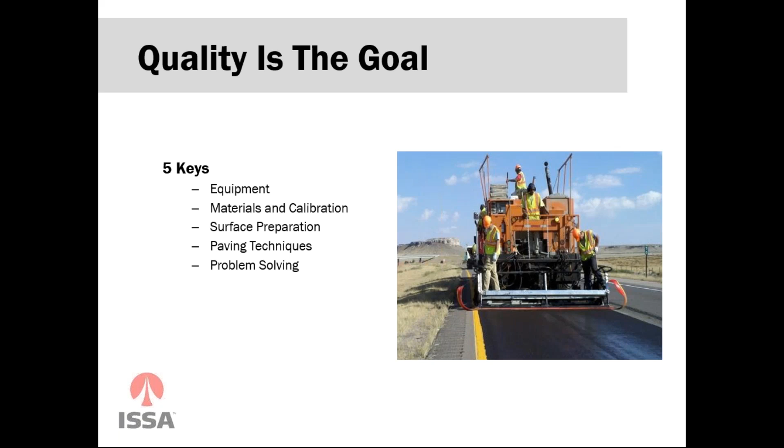There's 1,000 others, but for today, we're going to discuss these 5, being 1 is the equipment. We'll discuss equipment, different types of equipment, how those different types of equipment may work, what they may be able to do or not do to be successful for your project. We'll move on to materials and calibration and how important each one of those processes is in this procedure. Lots of materials go into this application. You can have the best materials, you can have the best everything, but if your calibrations are not done or not correct, then none of that's going to matter in the end. We'll talk about some surface preparations and things you can do beforehand to make that job successful, and if they're not done, what it can lead to. Different ways of paving and different applications that can be used to make the job successful, and then again, the problems that we see in most micro jobs and what we can do to fix them.

So in saying that, we'll jump into the equipment and start from there. So what is a slurry paver? A slurry paver is a lot of things all mixed up into one box. If you've been in hot mix, you know that there's a lot of different applications and different equipment and needs that you need to be successful and to process that job and to produce that job for the agency or the owner to be successful.

So we got a dump truck here bringing rock to or from a job site. You got your hot mix plant where all of the materials needed for that job are brought to one central location and put in and come out at the end for your 9.5, 12.5, your HMAs that are needed for the job. It's just kind of out of order, but there's your roller at the end, making that road nice and smooth, getting that bonus, that ride bonus at the end of the job.

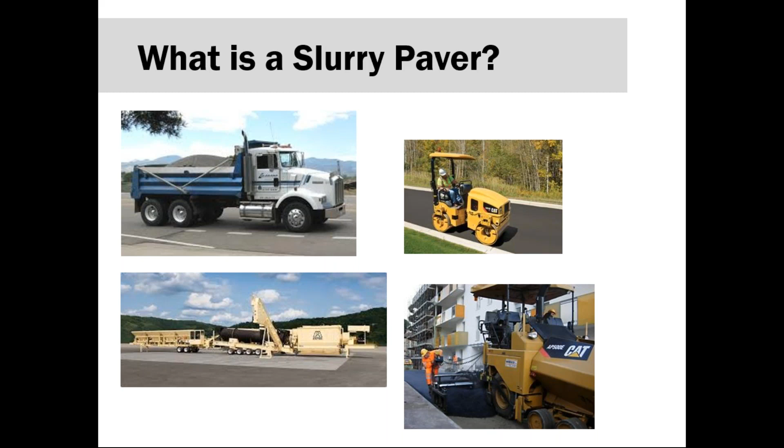And obviously your paving equipment that's on the road laying down that mat. So when you take all four of these things from a hot mix application, when you're talking about slurry equipment, what you have is an all-in-one package.

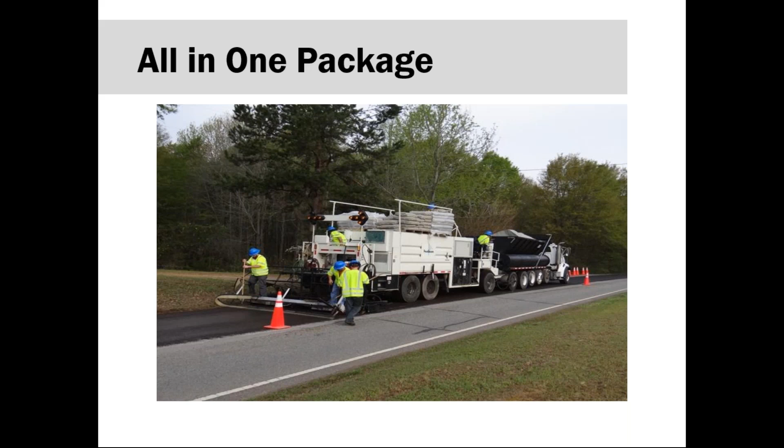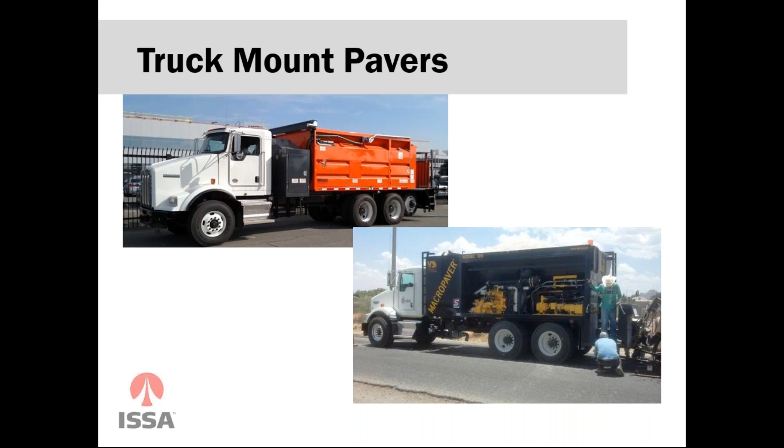It's the same as the continuous paver that I showed you earlier, in the sense that all the material is located here. There's tanks. You'll see the tanks on the front for your water and emulsion, your rock, everything coming out in the back in a finished product.

So there are advantages and disadvantages to both types of these applications. Being a truck mounted paver, your advantages are your flexibility. You're able to move around, as you can see, on your own wheels. You're not needing any help getting from job to job. You got smaller crews in the sense that you've got a driver and the same people working each truck on the back of the job. You've got a smaller crew.

You're able to get to the job easier because you simply have to drive the truck. And then the maneuverability - there's an asterisk here on maneuverability, just because depending on axles and depending on weights, that can be an advantage or disadvantage, because of bridge laws and things in each state that may cause challenges as you're moving from job to job.

So when you're talking about truck mounted pavers, some of the disadvantages are the fact that every time that truck goes empty, you have a transverse joint at about every 1,500 feet or so, depending on what your pounds per square yard are. You have heavy axle loading, as mentioned earlier, that may affect maneuverability. And then this equipment is somewhat expensive, considering the fact that it's going to spend three-quarters of its life driving to and from the stockpile, because once it goes empty, it needs to return to the stockpile.

It has to return and reload. When you're talking about truck mounted pavers as well, your operator does not control the speed - the driver of the truck is controlling the speed. So there's a communication requirement needed between those two guys to make sure that we're laying an efficient mat on the back of the vehicle.

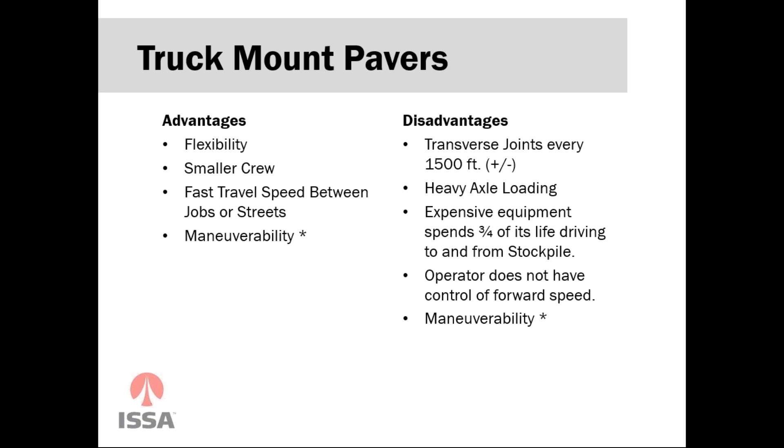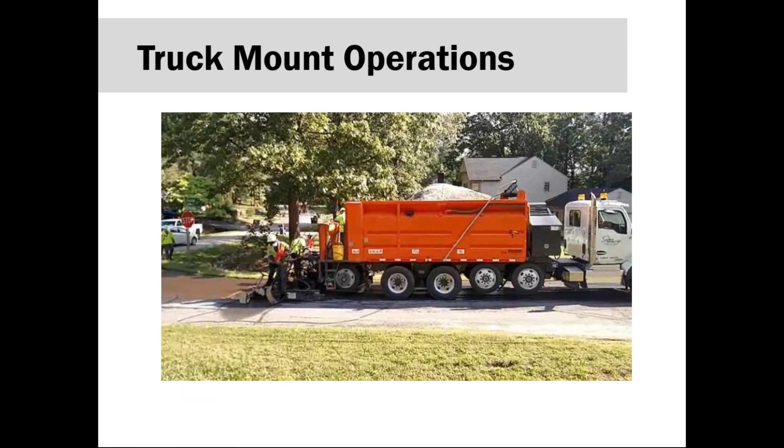So as you can see here, this is a truck mounted operation, just to give you guys an idea what that looks like for you non-contractors on the call today. You'll see the material disappearing from the hopper. Your emulsion and water tanks are obviously on the side there, and material coming back to place a nice mat, 8 to 12 feet wide, in the back of the vehicle.

So the other side of the operation, if your job or position is not requiring a truck mount, is the continuous paver. And this is what a continuous train, as we would refer to it, looks like. You've got your continuous paver, you've got your support units up front, bringing material to and from the stockpiles to the equipment. And as you can see, the guys on the back of the equipment, they are ready to lay the mat down.

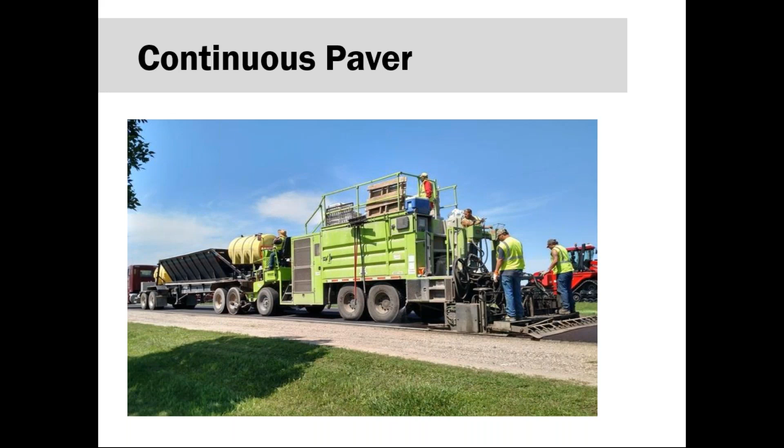Looks very similar, but just to give you an idea what that train looks like going down the road. You'll see the guy walking up and down the stairs there.

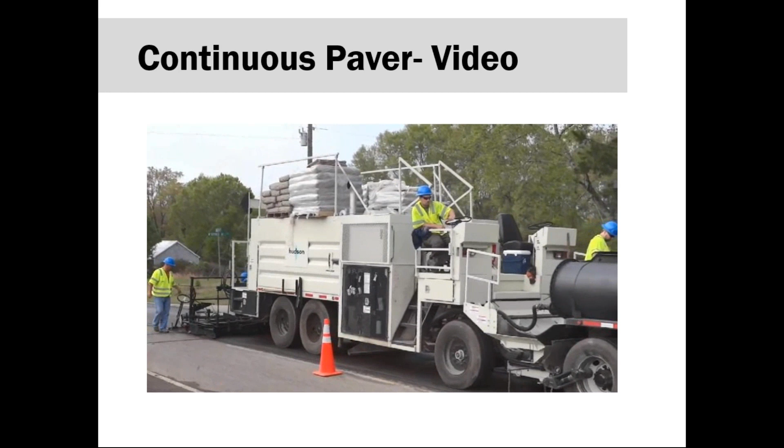His job is multiple, in the sense that he's required to hook that truck up, and he's required to unhook that truck when things go empty. He's also watching the hopper and the cement hoppers to make sure they're adequate in materials as they continue to move down the road, hopefully with no equipment failure or material issues.

So they can continue down the road at infinite lengths with no joints. That's one of the advantages on the continuous paver. So fewer transverse joints when you're talking about continuous. Your operator on the back of the machine is controlling your speed, which is different.

You have the guy on the front who is steering, but he is simply doing just that. He is maintaining that joint line to try to keep things straight and in line as they move down the project.

For the most part, in a continuous job, you're going to be able to do more miles per day. Your driver can move to either side of that truck to be able to get the best visibility and the best options to maintain those lines and joints.

When you talk about support trucks, they're inexpensive in the sense that they're only going to the jobs, to the stockpiles and back. And with the continuous paver versus a truck paver, you're only having to calibrate once. With a mounted paver on a truck, you're having to calibrate each machine, versus a continuous where you're only doing that one time. The disadvantages obviously are if that paver goes down, then you're down.

You need additional crew members to perform these options because you need more truck drivers, longer lengths of road that you're probably going to do inside your closures. So more safety and regulating with road closures. And then you have one paver per job.

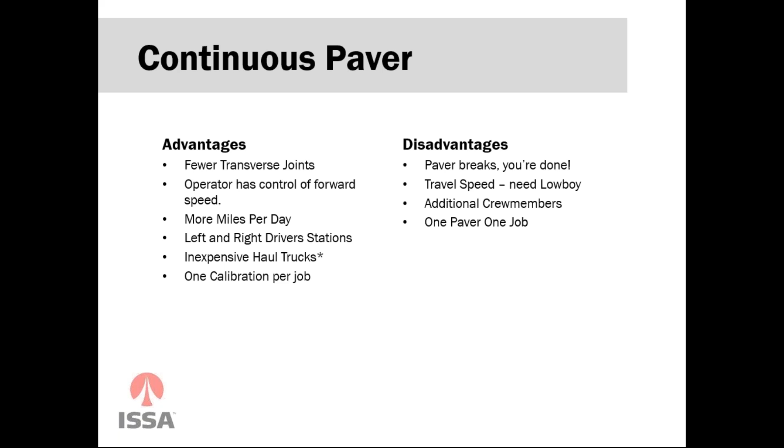So both pieces of equipment are applicable in any circumstance. One's not necessarily better than the other. They just may be better in that situation than the other, given the circumstances.

So talking about either one of those pieces of equipment, you have two different types: mechanical and electronic. For the most part, mechanical units are being phased out in the sense that most everything in the market today is moving to the electronic side, but they're still out there. So from an educational standpoint, we'll discuss both for these purposes.

In a mechanical or air-over-hydraulic system, you've got a jack shaft that is powering the emulsion pump and the aggregate belt, keeping those things in the same ratio. Those hydraulic systems are operated by basically poofs of air, and each poof of air is like a counter. It's keeping that jack shaft, your emulsion and aggregate in sync, because all of your mix designs are based around your aggregate for the most part. So everything needs to be in relation to that.

The different ways of counting your aggregate can be by gates, or by the speed of conveyors, but there are different options as to how you do things, and that's what we're discussing here with the mechanical and electronic options.

So when you look at electronic pieces of equipment, that piece is using computer-controlled hydraulic motors, separately powering the aggregate belt and the emulsion pump. What that basically means is when you're talking electronic, you're talking speed of the aggregate versus amount of aggregate that you're basing things off of. So there are always adjustments going on, and that computer is maintaining the ratio between your aggregate and emulsion in your mix design.

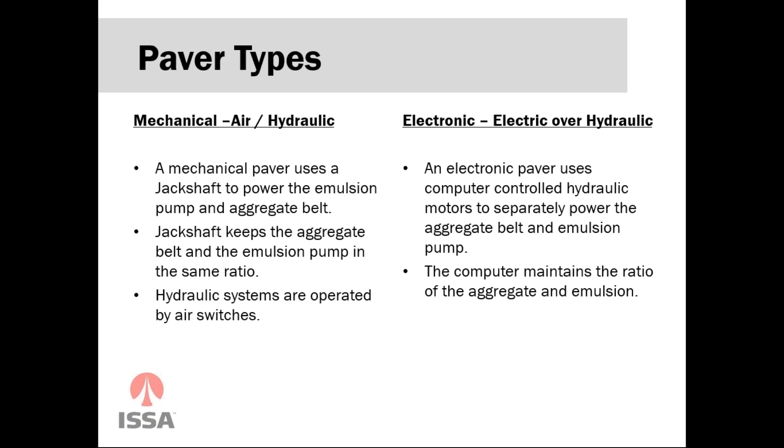Your mechanical paver, like I said earlier, the aggregate is going to be based off how much aggregate you're allowing out of the back of the hopper. That gate is going to move from 2 to 3 to 4 inches, and that's going to control how much aggregate you're having.

Your emulsions and all those things are going to remain consistent, and you're going to control that system by how much aggregate you're pushing out the back of the gate. So you're using electronic counters, counting revolutions of that belt and that emulsion pump to maintain that ratio between the two.

When you go to electronic pavers, it's a fixed aggregate gate. The same amount of rock is coming out depending on the speed of the belt, but the hole on the back of the gate is never changing. The emulsion content is controlled by that computer controller.

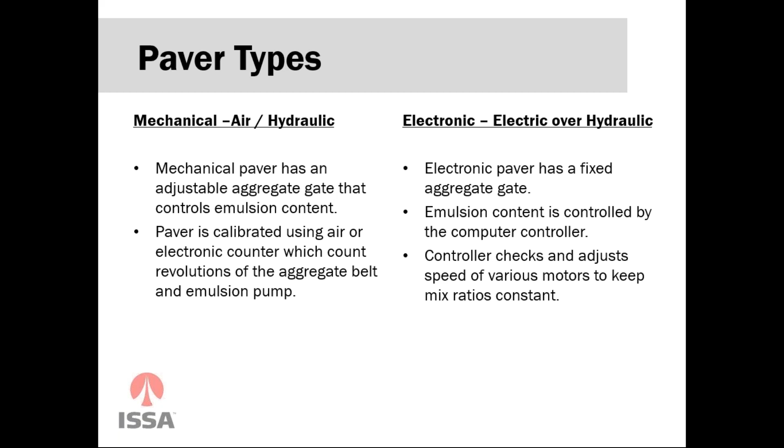If you speed up, it's giving you more emulsion to maintain that mix design. If you slow down, it's giving you less emulsion for that mix design. And then it continues to check and adjust the speed of various motors to make sure that we're maintaining the mix ratios consistent with the job mix formula.

This is just a quick picture here of the two different setups. On the left is the mechanical jack shaft. You'll see the cranks and the chains and sprockets as you would imagine with a mechanical setup. And then to the right, I don't want to say neater, but more as you would imagine with an electronic system, as things evolve, where you've got your checks and balances, your emulsion pumps, everything in a nice neat box there and being pushed by the hydraulic units.

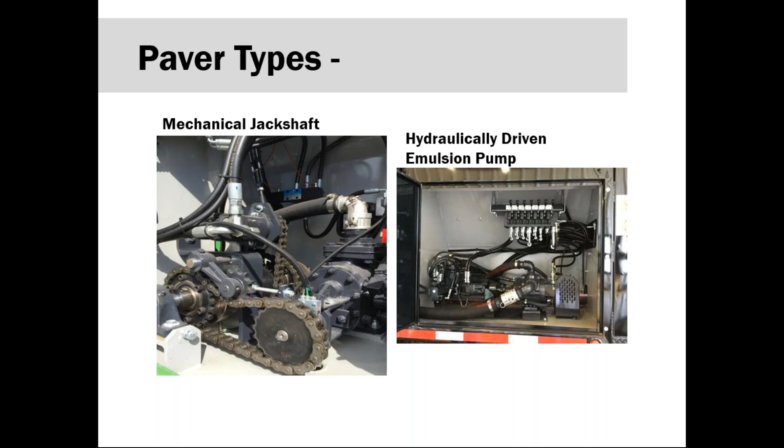So as we have truck mounts and continuous pavers, we also have different computer systems to help us through the process and make sure that we're doing these quality projects in any particular circumstance. So you have a monitoring system on the left, which is basically capturing the information with those counters that we discussed earlier.

It's capturing that information, but whatever information you're putting in, it's capturing, whether it's good, bad, or indifferent, that's the information that it's catching. At the end of the day, it's going to give you a visual and printed report. It's going to be able to show you the quantities that you used, all the percentages, and the square yards applied. In the same sense, whether those numbers are right or wrong, that's what it's going to give you.

When you start discussing computer mix control, what that's doing is you input your mix design, the parameters which you're trying to do the product, and it is not going to allow you to be outside of those parameters. So there's where the control comes in. You still have control of your mat, you still have some options with how your mat's going down and what you're trying to accomplish, but it's going to make sure you maintain the ratios of emulsion or water or additives, whatever it may be, that you're complying with what the owner of the project has requested and been approved for that project.

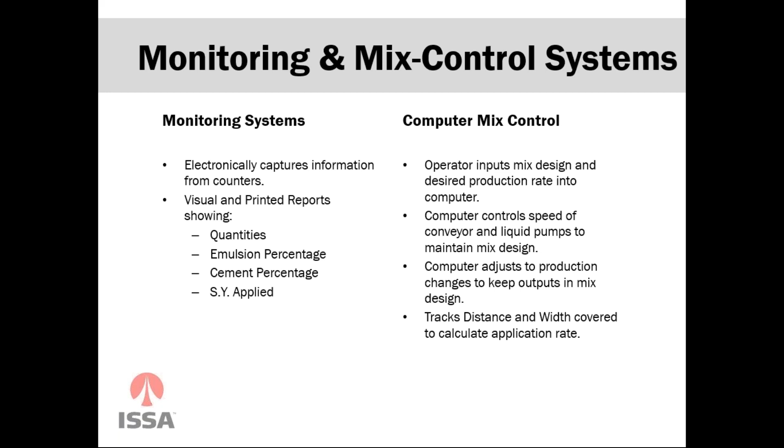So that computer controls the speed of the conveyor and the pumps to maintain that design. It's adjusting to the changes, and it's always making those changes to make sure that we're retaining that information that we gave it earlier to stay in that mix design. And it's also tracking your distance and your width, which allows us to put down that total square yards or those pounds per square yard that we need at the end of the day, which most owners are looking for.

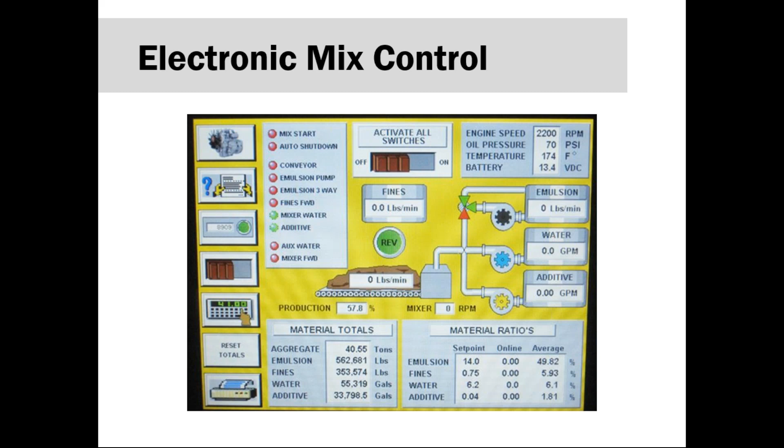So besides the machine, the second part of the equipment standpoint is the box on the back of the machine, which I pointed out earlier. There are different options depending on what you're trying to do.

One would be your Slurry Box, which is a lighter box, expandable to different lengths. You can do it with no augers, or with front or dual augers, but with a Slurry Box, because of its weight, it is slurry only.

Versus you have your hydraulic spreader boxes, which are all dual augers. They can perform with slurry or micro. To expand or decrease the widths with those boxes, you must stop and take certain kits out to bring those joints down to the width you're trying to perform.

And then you have your variable width spreader boxes, which are also dual auger and can do slurry or micro, and they're adjustable on the go, which I'll show you pictures of later on how that's performed.

And then of course your Rut Box, which is specific to job descriptions or needs depending on the situation of the road you're trying to perform on, and we'll show you the parameters of jobs that sometimes require those Rut Boxes to be needed.

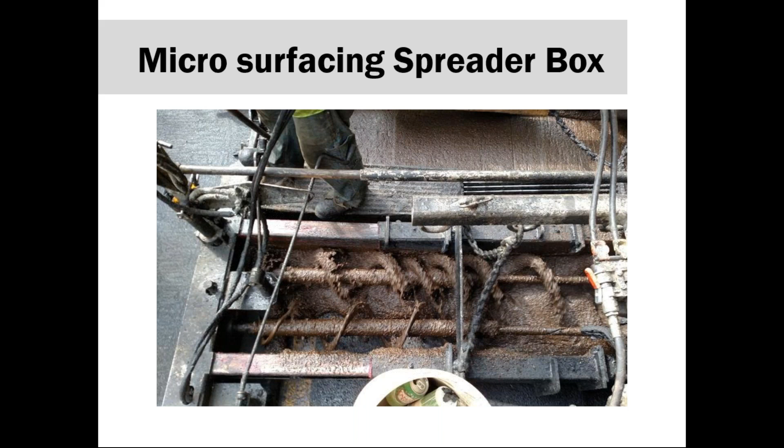So here's a different type of micro spreader box. You'll see it's a little beefier. The back of the job is obviously at the top of the screen there with the mat going down, dual augers. I'll show you a video here in just a second. Augers are always trying to move material to the back of the box to keep it from building up in the front, as you can see in the photo here.

And here's a video of the spreader box operation. Two things to show you: one, the augers are moving, as I spoke of earlier, moving the material to the back of the box, which is on the top of the screen. Second, the material shown in this video is actually a little to the wet side of what we would prefer. You can see material coming out the front of the box in the beginning as they try to thicken things up, but it's a perfect level in the sense that material is right to the shaft of the box and things proceed as you would expect as they move forward.

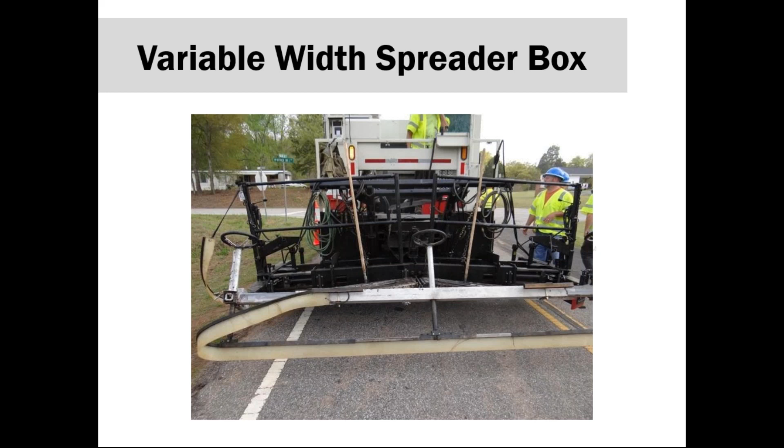If you look up to the left and right around the gentleman's head in blue versus the street sign on the left, you'll see some toggle switches there. What that's allowing us to do is move that equipment and that box by hydraulics, to be able to expand on the fly as we move up and down the road and adjust the curbs or outlets, whatever it may be that we need to move to and from, without having to stop and take pieces out or move the truck and come back and do handwork, as with any quality job we prefer to do as little handwork as possible.

So here's the Rut Box that we discussed earlier. As you can see, a little different design. They come in 2 different standards, which is 5 or 6 feet, with a little different setup with the augers.

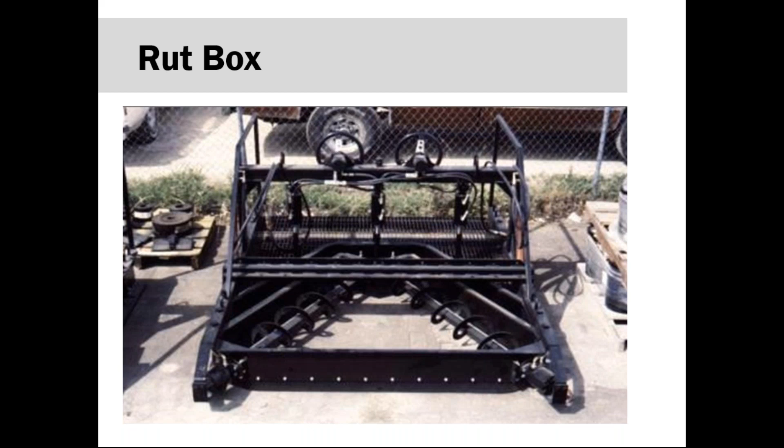As you can see, the augers, everything with the augers in a Rut Box is trying to move that material to the center of the box where that rut may be located. The purpose for that is to try to get the larger aggregates moved to the center, so the larger aggregates will fill the bottom of the rut. That's key any time these units are called on to perform, because we want the larger aggregates to build that foundation, to be a cornerstone for what we're trying to do in leveling out those ruts that may be in the previous application we're correcting.

When we're talking about ruts, there's a cross section deformed 1/2 inch or more that should be treated with microsurfacing in a Rut Box. If the depth of that rut exceeds 1.5 inches, it may be advisable to use a larger aggregate than the rest of the project requires. Rut filling is normally accomplished with a type 3 or greater aggregate gradation, meaning the larger the type 1, 2, or 3, the larger the gradation we're calling for in that mix design.

The deep lifts may be constructed on the low side of the optimum asphalt content range. When we use a Rut Box, we allow the largest particles of aggregate to be channelized to the deepest part of the rut, which is illustrated here in the cross section. You'll see the finer stones flowing out to the outside of the rut, and we want those larger stones filling that center zone where the rut actually applies.

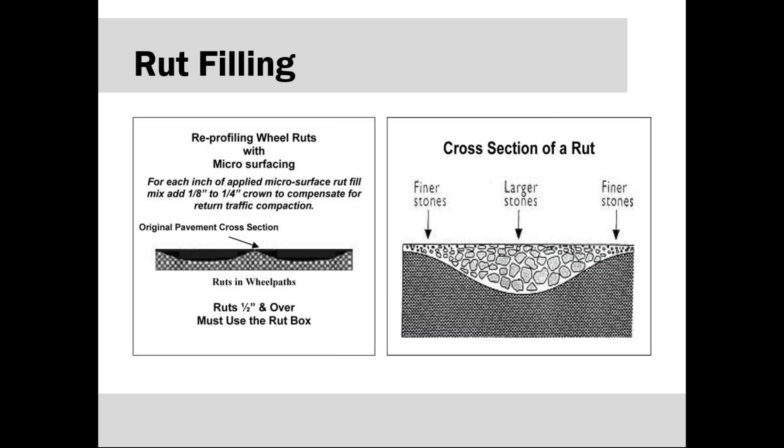So if the contractor adds an 1/8 to 1/4 inch crown on top of the rut, we basically want to fill it up like a pie, kind of like a cupcake, overflowing a bit, to allow for traffic to come back in for our compaction at the end of the project. Anything 1/2 inch and over, just to emphasize, we need to require a Rut Box on the project.

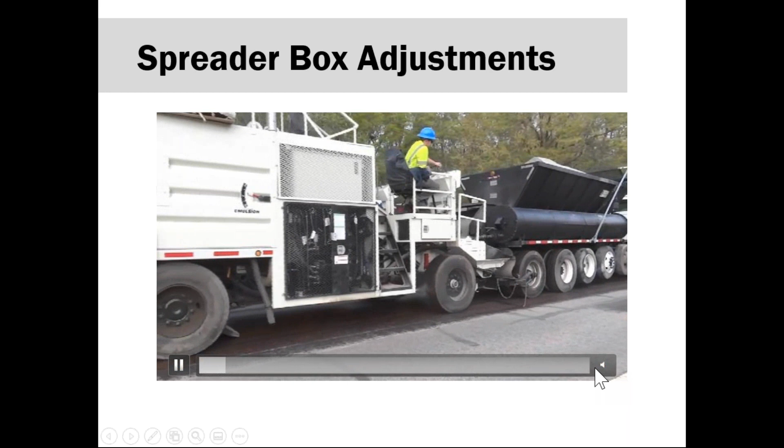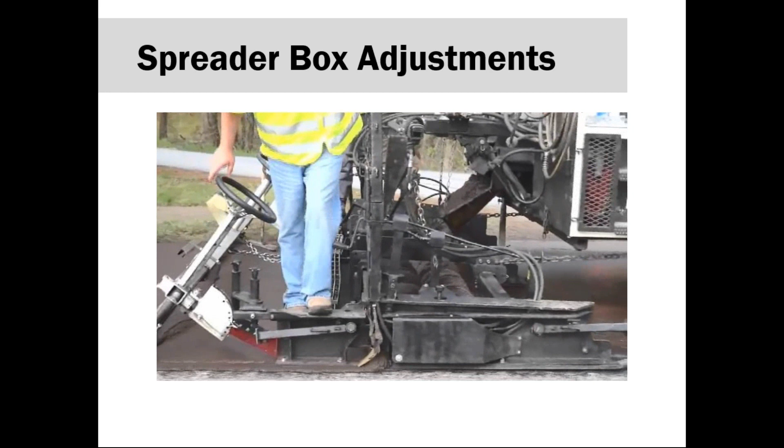Here's a short video. It's basically just showing you what we discussed earlier with the different crowns and different things going on with the job. This guy on the back of the machine is going to be turning those wheels, and it's not big turns, it's small adjustments, 1/4 inch, 1/2 inch at a time, if that, just to maintain that even mat as the material's flowing out of the back of that box. That's the advantage of that secondary screed as we move down the road.

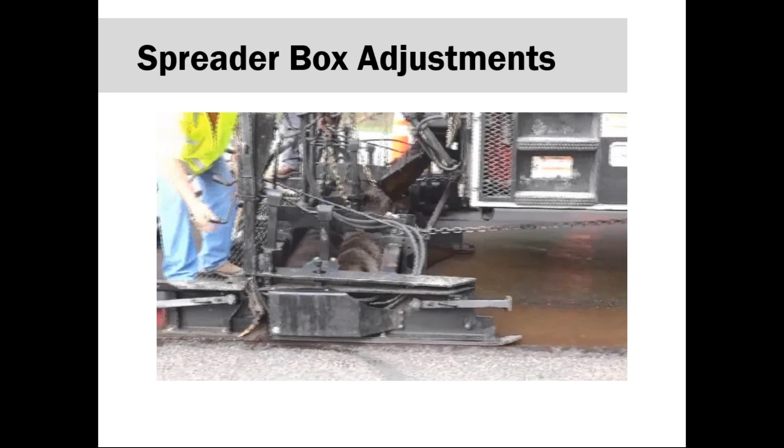Of course, the equipment's only as good as what you take care of and how you treat it. Some things you would look for at the end of the day or during the project is cleanliness. You want to clean your pug mill nightly. Some units have slide-out pug mills and different things that allow that to be done easier.

You want to touch your spreader box, no matter which kind you're using, basically every time you stop. If you're using truck mounted equipment, you want to stop, clean, get those corners clean, and try to keep those augers as clean as you can. And of course, at the end of every day, you want to break down and clean that equipment as much as possible.

You want to look for things under the equipment, with aggregate spillage under your feed belt or your mixer, and of course under that front rubber, which could cause trails in your mat, different things to develop as you're moving forward that just cause you to have to touch the mat more than you would want to clean those types of things up.

And then of course, if you've got a liquid leakage, meaning hydraulic oil, fuel, anything, emulsion, that's going to cause that material to be unable to stick to the virgin ground that we're preserving, that could cause problems that you want to address and keep an eye on as you're moving forward.

So with the spreader box, like I mentioned earlier, we want to clean that thing often. The augers stay within ½ inch of the roadway, or as low as possible. Those things will wear over time, so that's something to keep an eye on. You don't want any foaming or splashing mix in that spreader box when we're going down the road.

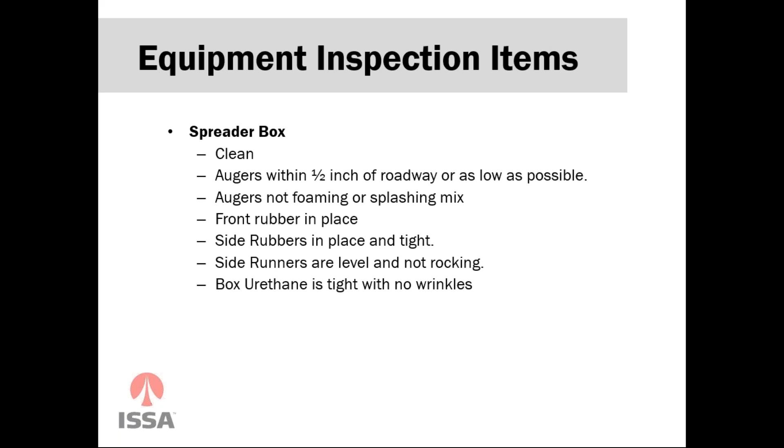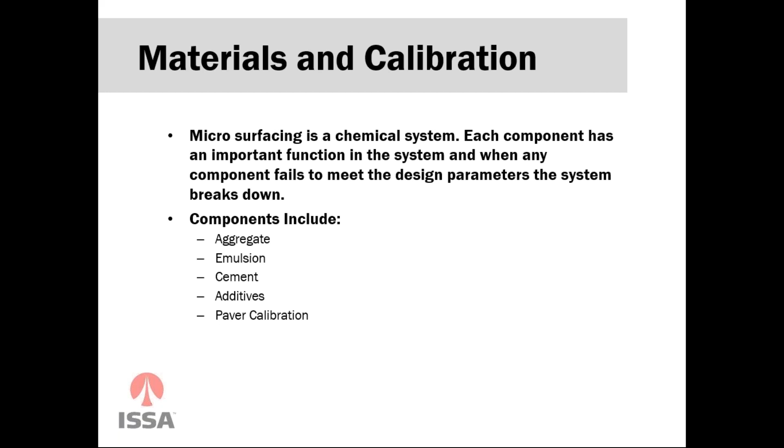I'm not going to go deep into materials, but you need to understand what the system is doing. It's break, set, and cure. It's doing all this chemically, and it's doing it quickly for the most part if things are being done right. So it's a chemical system, and each component has an important function in the system, which those components include the aggregate, your emulsion, your cement, your additives, and not to be left out, and maybe one of the most important things, is your calibrations, because without that, your quality of these other products doesn't matter if your calibration is not correct.

So when you're talking about aggregate, you're obviously talking about gradations. You're talking about your acidity, your compositions of the rock, different things that you've done with your mix designs to make this particular aggregate appropriate for the project that you're performing.

So you're not really worried about the top side of the rock. You'll get some top size issues that can be pulled out of the mat, or from cleanliness issues at the bottom, from your loader not performing his job correctly. But when you need to start paying attention is if you talk about your 8 and your 4 — they'll go coarse, which can cause some raveling and some noisy rides. You'll have those rocks popping up under your vehicles.

The most important thing we can talk about when we discuss gradation would be the 200. The 200 is a smaller portion. It's your dust. It's the thing that allows more product to be stuck to or adhered to with your emulsions and your waters as you're putting the mat down on the ground. So if you don't have enough, you cause the system to flush. If you have too much, you cause the system to be too fast. Not one of these problems is necessarily worse than the other — they both bring their own challenges.

As I mentioned earlier, make sure your operator's staying out of the bottom of that pile. You need to assume some waste whenever you're stockpiling a job, because you do not want to be scraping ground and getting rock and other virgin materials mixed in with the aggregate that we're trying to produce with.

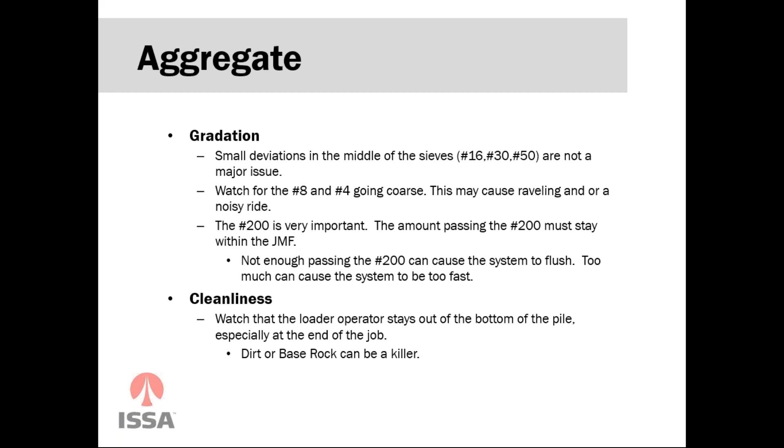So when you talk emulsion, the optimum temperature for the emulsion is between 80 and 110 degrees. Anything under 75, you may see some separation or some shear. That could happen during storage if you allow your material to sit too long before usage. If it comes in too hot, meaning straight from the factory and hasn't had that chance to cool off to get to the temp we're looking for, it could cause that break we just discussed earlier — in the box or right out the back of the box. It's a little too quick for optimum procedures when we're trying to put the mat on the ground.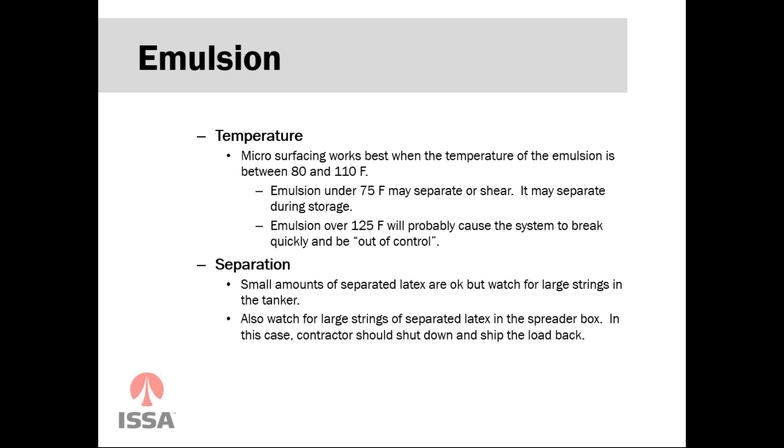So when you talk separation, you may get small amounts of separated latex, but that's okay. You're just looking for the large strings coming out of the tanker — that's obviously a problem that needs to be addressed. If you see large strings of latex in the spreader box, you probably need to shut down — that says ship the load back. There are obviously conversations that need to be had with your emulsion provider about ways that can be addressed. It's not good. Most emulsion providers are going to be aware of that before it even happens and taking care of the situation. That's where the relationship comes in with your providers — being able to communicate throughout the process as the day changes, and cloudiness versus humidity and rain and sunshine. All those things could affect how this stuff's reacting once it gets to the job site.

So with cement, you saw a picture earlier — pallets of cement on top of the unit. It's a small percentage that we're introducing to the mix, but it's a very important part of the process. It's giving you that thicker, creamier mix, and it's keeping that water from separating in the spreader box. We're trying to keep two things together that don't like each other. The cement is giving us the opportunity to bond those things quicker than they really want to, by breaking down that pH or causing that pH shift.

So you can adjust your cement percentage during the day depending on how things are reacting — cloudy in the morning, cooler in the morning, hotter in the afternoon. As the climate and your environment change, cement's always one of those things that's going to move up and down throughout the day depending on how things are reacting. The key thing about cement: it does not make the mix brittle, it's not giving it that crustiness, and it is not adding strength. It's simply an option for us to allow things that chemically don't like each other to bond — like a first date situation, getting to know each other better. There's no better way to put it.

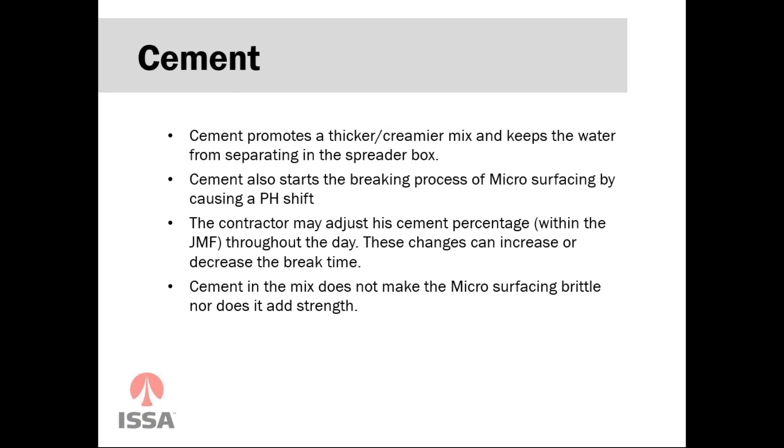So the next part is calibration. So why do we calibrate? We calibrate because we're trying to deliver a precise ratio of emulsion to aggregate. That's the key to our mix design, is our emulsion and aggregate ratios, and then our mineral filler to aggregate, as specified in the mix design from the laboratory that we've used for this JMF.

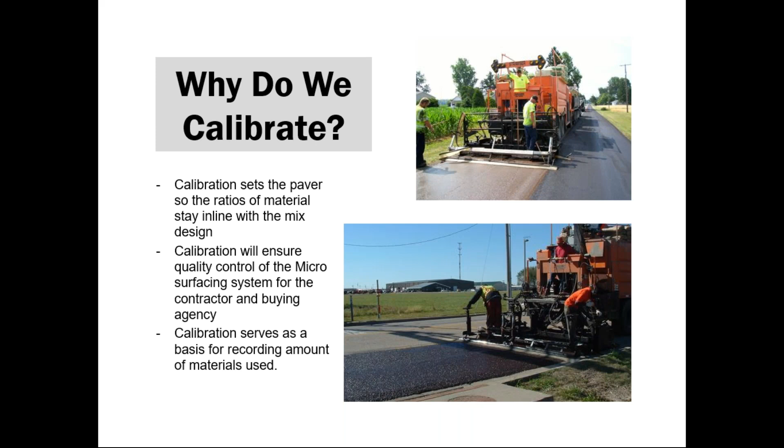By doing this, the contractor and buyer know what they can expect from the mix, because tests have been performed in the lab on a mix with the same ratios. It also allows a precise record of the amounts of material that were applied on the project for payment purposes, which is another key ingredient to performing a quality project.

So as we discussed, we're calibrating to make sure the mix matches the design. The aggregate and emulsion are staying together in the ratio.

Reasons to recalibrate - this is up to contractors on how often they do this, but we as equipment manufacturers would say you must recalibrate if you have a material change, if your source is changing from your emulsion or your aggregate, if you've had any kind of repairs to your equipment, being even a repair or a change, and then if you've had to replace any conveyors or anything delivering material, now's the time to recalibrate.

We recommend emulsion should be calibrated every job, or at least once per month if you're not changing out your emulsion provider.

So when we calibrate, we're trying to take a batch mix design, which is like a concrete plant, and we're trying to turn that into a continuous feed process. The aggregate and emulsion are mechanically or electronically - as we discussed earlier with the different types of equipment - we're doing it different ways, but we're trying to do the same thing to get to that mix design ratio.

In some pavers, that's a fixed gate, be it 2, 3, 4 inches, whatever your calibration requires, or in others, it's electronic, by the speed of the gate or by the speed of the aggregate, and everything's adjusting according to that.

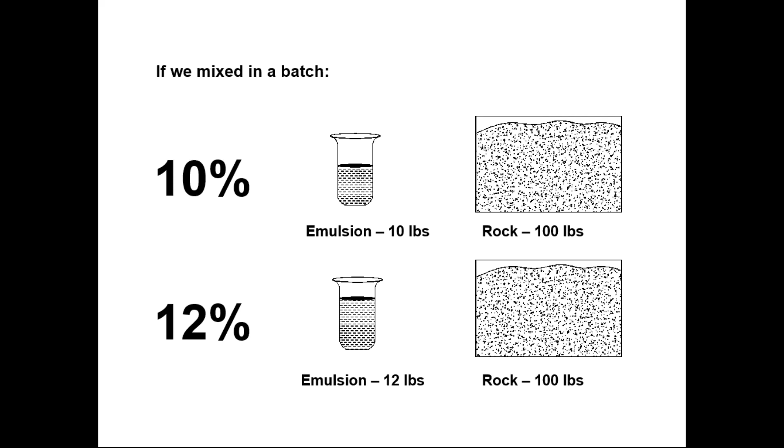Here's a small example. If you're talking about batch, you've got 10% of emulsion, or 10 pounds, versus 100 pounds of rock. So that's an easy example of a batch plant. We're doing the same thing every time. We're producing that material and we're moving forward. If you want to go with 12% emulsion, you would add 12 pounds to every 100 pounds of rock, and that gives you 12 pounds of emulsion.

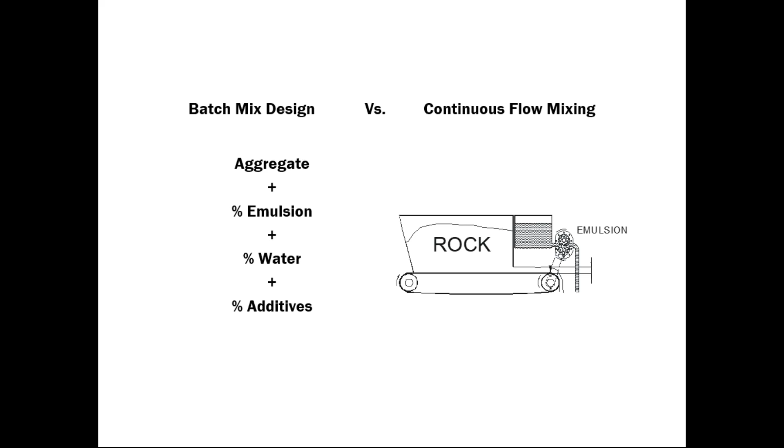On the left, which would be like a small cement mixer, you can see that you would put each percent of those ingredients in there. What we're trying to do is convert that to a continuous flow mix design, which you see on the right, where new material is always introduced and your quantities are always changing.

So what is calibration? Calibration is the process where the actual output of the machine is measured by weight for the ingredients of aggregate, emulsion, and mineral filler. The actual outputs are correlated to the revolutions of the aggregate conveyor, because the laboratory specifies all material ratios by weight to the amount of aggregate.

Aggregate is the driver for our mix design once it comes out of the laboratory. Everything is based around the amount of aggregate we're putting in the mix. And we do this with the use of counters.

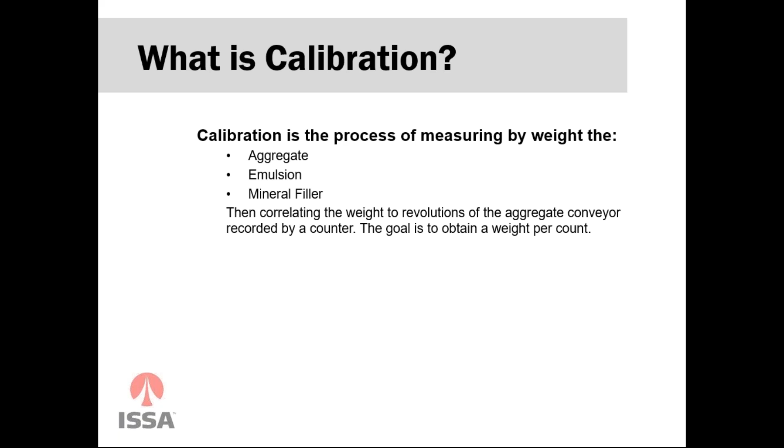So here you see a cross section of the hopper. You've got your rock and your emulsion. You've got your head pulley at the right - the bottom right there is your head pulley. It has 2 triggers, so it'll register 2 counts per revolution of the head pulley. The diagram also shows the emulsion pump, and we'll talk about the emulsion pump here shortly.

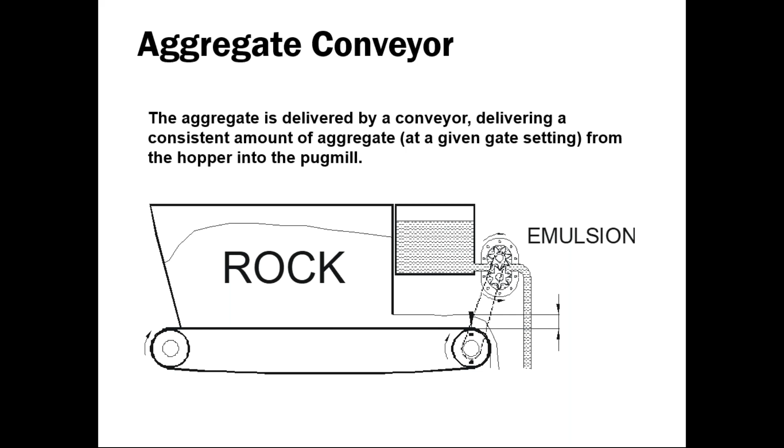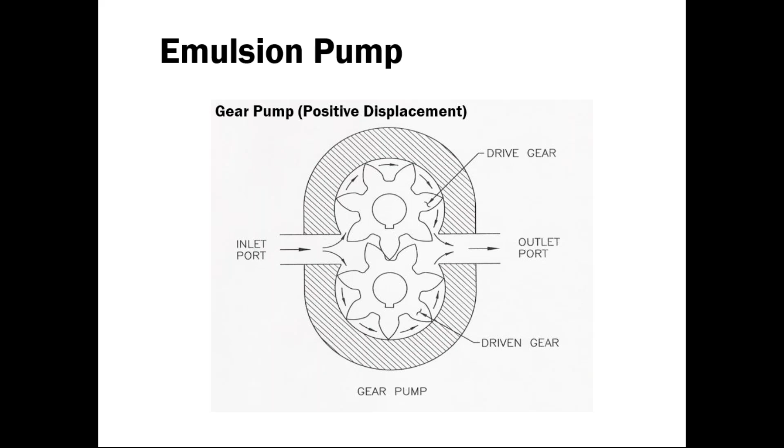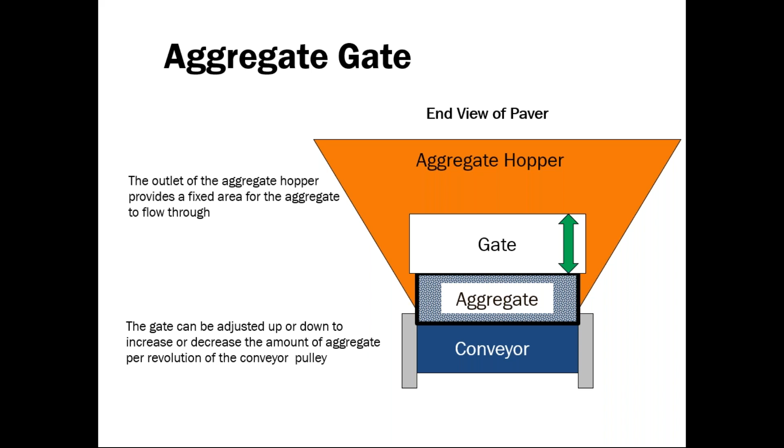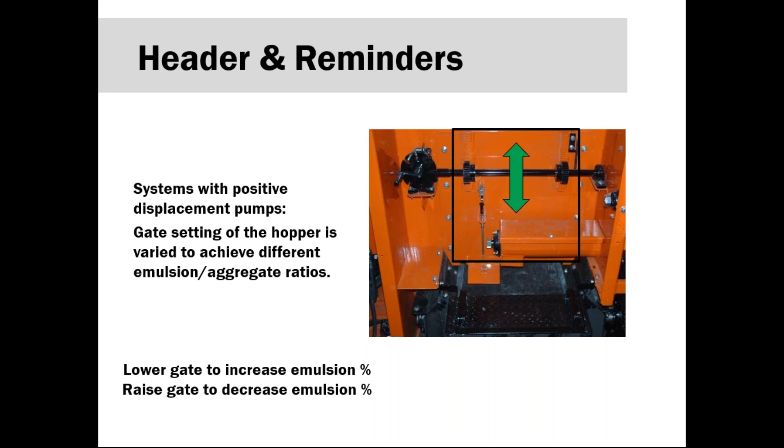So here's a picture. Since the displacement of the emulsion pump can't be changed in this photo, this is a mechanical machine, so the gate setting of the rock hopper is changed instead. That will go up or down. If you lower the gate to bring less rock into your mix, remember with mechanical equipment your emulsion isn't changing—it's the amount of rock that's changing. So if you lower the gate to decrease your rock, you're increasing your emulsion ratio. Versus if you raise the gate, you're going to decrease the emulsion percentage going into your material.

So in this example, the gate's set at 4 inches. If the conveyor turned for 10 counts, that's 100 pounds of rock delivered. During the same 10 counts, the emulsion pump delivered 10 pounds of emulsion. So that results in, easy math, 10% emulsion going into the system. If we lowered that gate to 3.3 inches, delivering the same amount of aggregate time, it delivered 83 pounds of rock by lowering that gate, with the same amount of emulsion. What we have there is a 12% rate of emulsion into that mix.

Since we have a continuous feed, the feed rates of the aggregate, the emulsion, and the fines must be tied together to ensure proper ratios of materials at all times. This is commonly performed with a jack shaft arrangement in mechanical systems, or a hydraulic series arrangement. These feeds are tracked with our counters, as we discussed earlier.

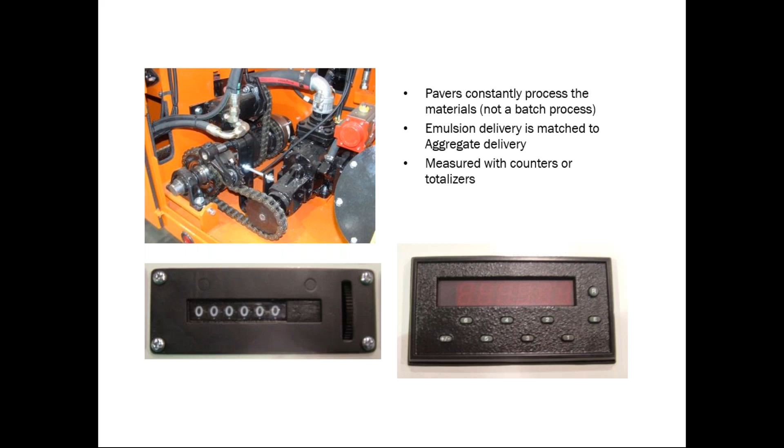It's important to note that a continuous feed is not to be confused with a continuous paver. In a truck mounted operation, the materials are fed as described above, but the paver paves until it is empty and then returns to the stockpile for refill. In a continuous pave operation, the materials are fed the same way, but the paver stays on the job while the mobile support units are moving material to and from the unit.

So moisture can be used in the calculations by performing calibration. There are several ways to determine this content. In the field, a sample of rock can be taken and weighed, then spread out on a cake pan and allowed to dry, then reweighed. Let it dry more and reweigh. You basically do this process until you come back with the same weight continuously, meaning all the moisture has been removed from the product.

Another field or shop approach would be to have the lab weigh a common volume, such as a coffee can or cup of dry rock, and note the weight for that specific aggregate. While in the field, you'll only need to weigh the wet rock in this known volume, making sure to subtract the weight of the coffee can or cup to perform the calculations. So you take your weight of wet rock minus your weight of dry rock, and divide that by your weight of wet rock, and that gives you your moisture content.

It's very important to track this daily, as we all know things change with stockpiles, with thunderstorms during the summer, during our paving seasons. Moisture is always changing, and it's very crucial to our mix designs to know what that number is.

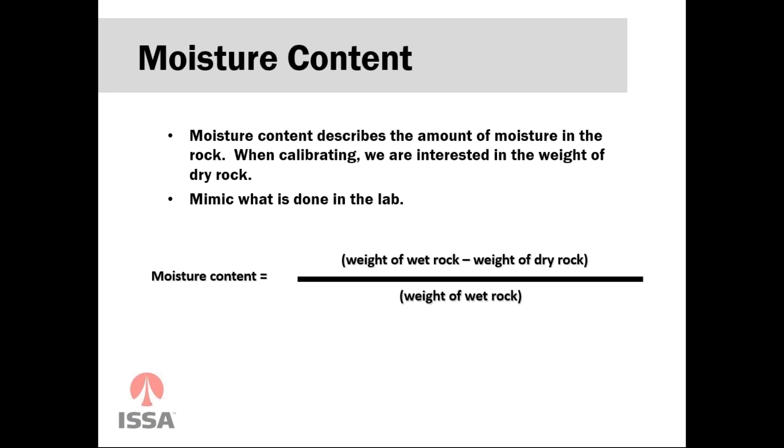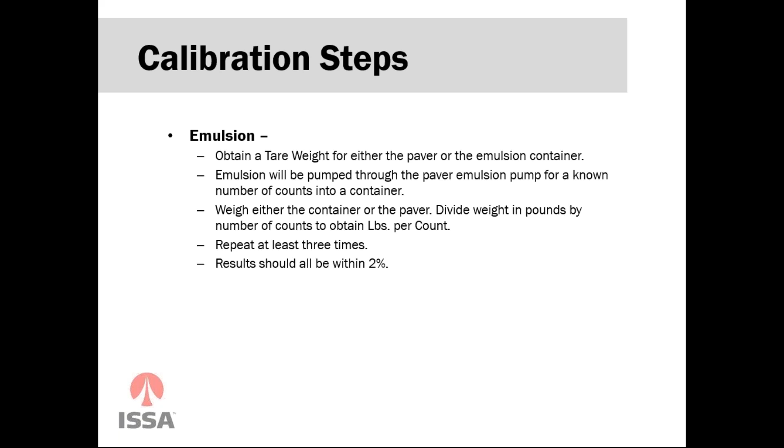So real quickly, we'll roll through this, but for calibration steps, you're going to get your tare weight into your container. You're going to do this a couple of times. You want to repeat this at least 3 times by weighing either the container or the paver and divide the weight in pounds by the number of counts you get from the computer or the counter in a mechanical paver at the same time. You want to make sure you get 3 results that are all within 2% of variation.

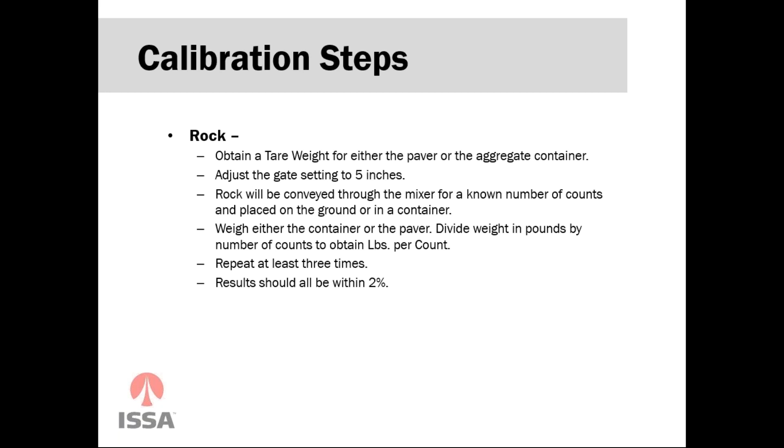Same thing with rock, same process. You'll run through this 3 times, maintain within that 2%. With rock in your mechanical equipment, with your adjustable gates, you need to do this 3 times each at 3 inches, 4 inches, and 5 inches. So it takes a little time in mechanical equipment to be able to calibrate for aggregate.

You're going to graph those aggregate pounds per count. You're going to obtain your desired emulsion content per your mix design, and then this will provide you with the desired aggregate weight per count. It's very confusing. Most of you guys won't ever see this. For you contractors, you do this in your sleep, so we won't spend much time for those that are confused. Here's a simple graph. On the left, you'll see something that's done electronically, and on the right, the old school graph that you're charting out to make sure you've got that straight line graph through the means or the medians that you're looking for in that mix design.

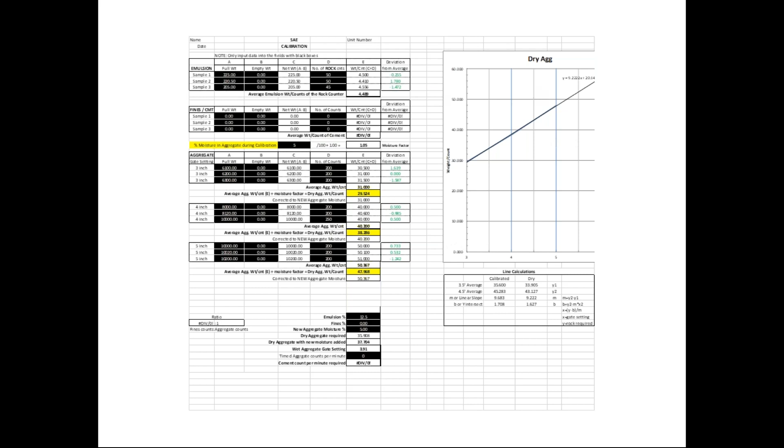So you can also use this as a double check, as an agency or as an inspector, to check the calibrations.

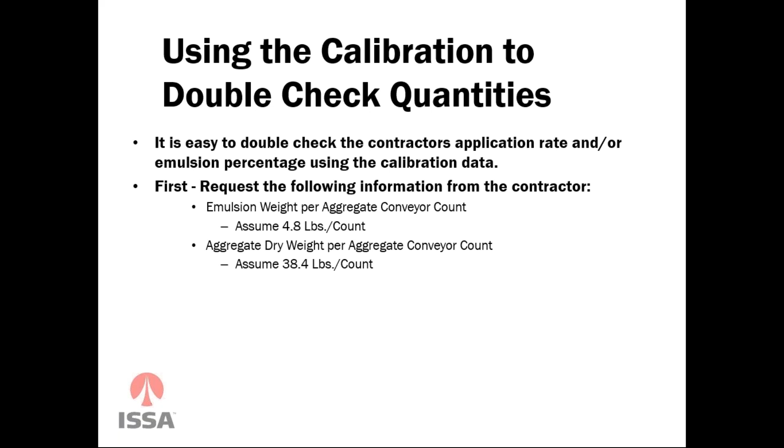Let's assume 4.8 pounds is what your emulsion weighs. Your aggregate is weighing 38.4 pounds per count. Take those numbers, take a known length of 1,333 square yards. Just for this process, we'll assume a count of 356 and 1120 on those counters we saw earlier, and say 764 counts gives you your pounds. Take those pounds, and my apologies for rushing through this - as we said earlier, this will be advertised on ISSA, so if you have any questions we can roll back through this later. But you take those counts, you come out to 22.01 pounds of aggregate application rate. Take some of that same math, divide by your pounds of emulsion to get your 12.5%, which is what your mix design calls for. Combine those two numbers to get your application rate of a hefty 27.5 pounds per square yard.

So this is a good way of being on the job, especially with electronic equipment. This information is provided pretty accurately, and you can spot check as you're moving up and down the road with the equipment.

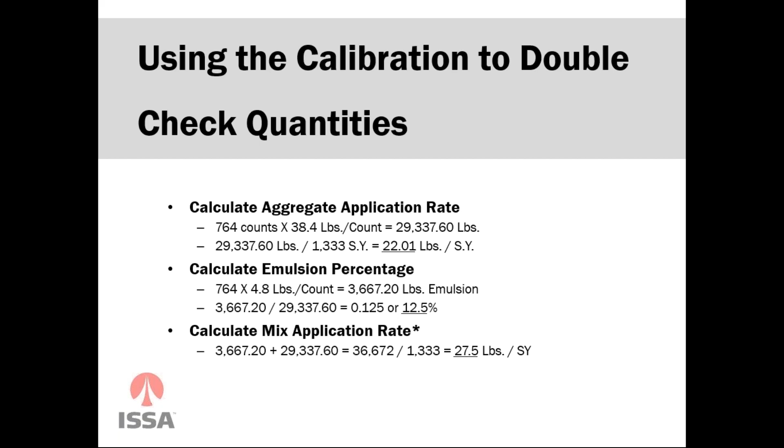So when we talk about preparation of the road, there's a few things done before any correct micro job is done. One of those being crack sealing. When we're doing crack sealing, we want to keep it flush and minimize overbanding. If we've got a 1/2 inch crack, we don't want to be 6 inches wide and cause that banding, which can be caught by the box. You want to try to give it 30 days if you can for your surface prep to give it time to heal and be ready for those pieces of equipment to run over and put the mat down.

Patching does a great job of filling lower areas, but if you leave a bump when you're patching, then your micro is going to reflect that same bump. We've said it numerous times in different presentations and opportunities, but it is what it is when you talk about micro when it comes to bumps.

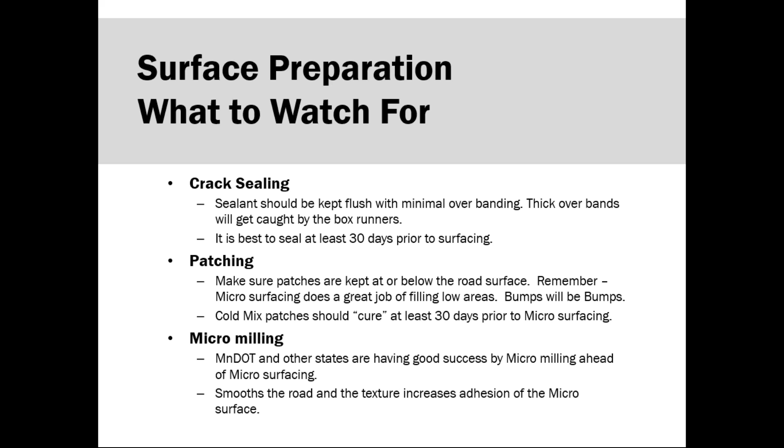And then there's several areas doing a good job of micro milling, Minnesota being one of them. They've had some success with their freeze thaw cycles up there, where it smooths the road and allows that texture to increase adhesion of the micro surface. So anytime you get a chance to micro mill, that's a good option to have when we're talking micro in the field.

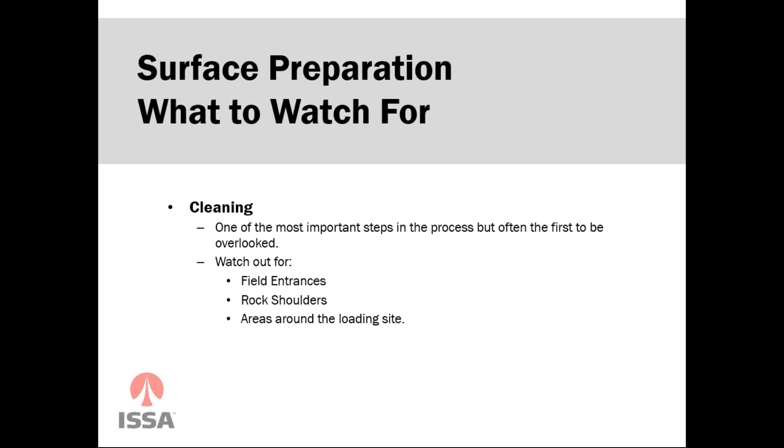And then of course you're cleaning your project before you start - brooms, blowers, whatever it may be. You need to look out for your field entrances, places where vehicles - depending on a lot of these jobs being in rural areas - people coming out in places unknown, bringing dirt and debris into the field. Rock shoulders can always add debris to the site, and then areas around the loading site.

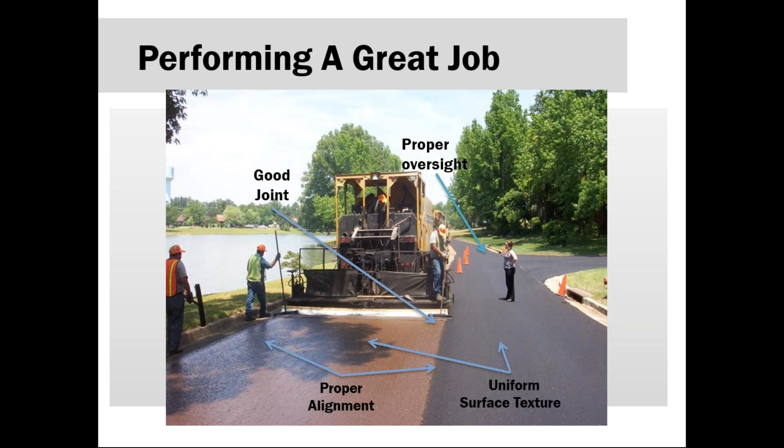So there's different paving techniques that are done. You'll see here when you start talking about joints, they got proper alignment with their mat. It's a uniform surface texture that they're performing the job on versus the existing or the previous spot they've been. They got some oversight on the right, as you can see. I hope that's a good conversation going on. The guy on the right doesn't seem to be paying much attention, so who knows?

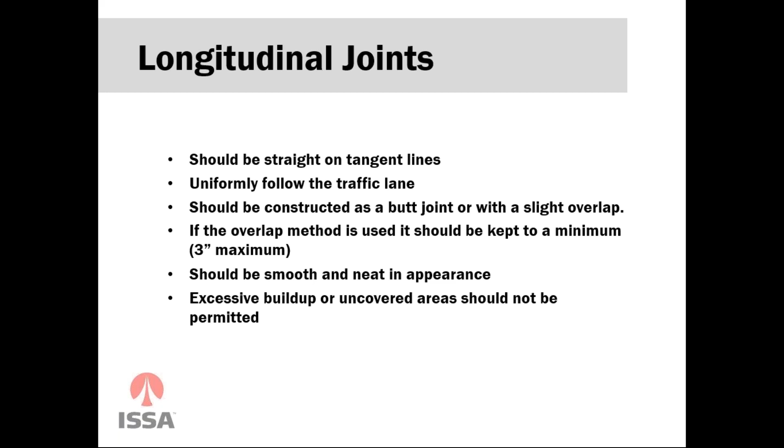And then we get into longitudinal joints, which is that center line that's so important in performing the process. It's straight on tangent lines. They need to be uniform, following the traffic. They need to be constructed as an overlap or a butt joint. If you're doing an overlap, it needs to be kept to a minimum, 3 inches maximum, smooth and neat in appearance, and we want to keep from having excessive buildup or uncovered areas.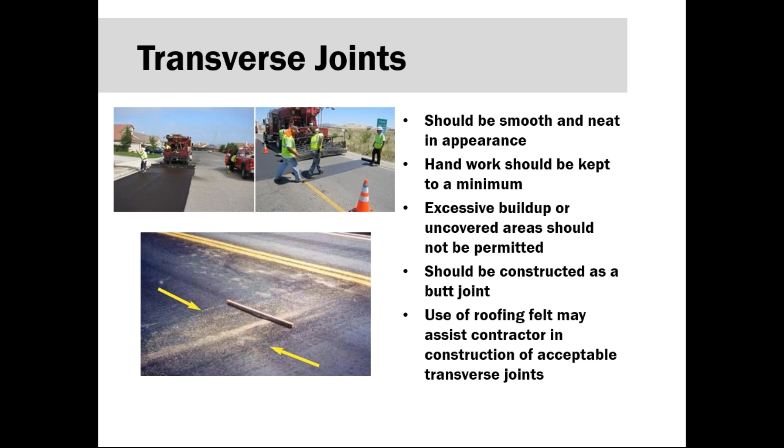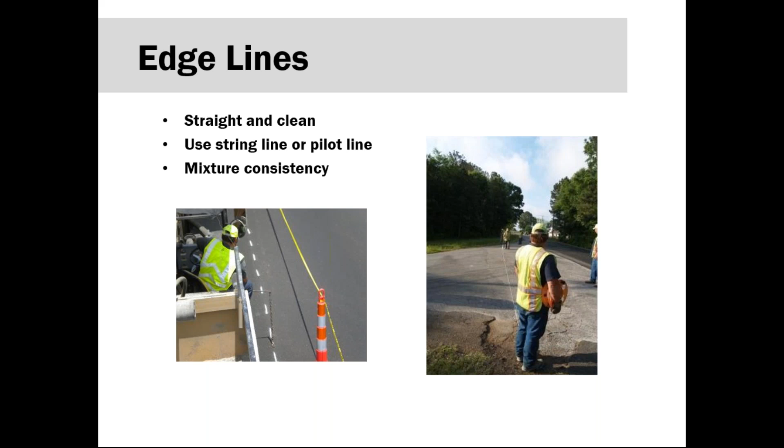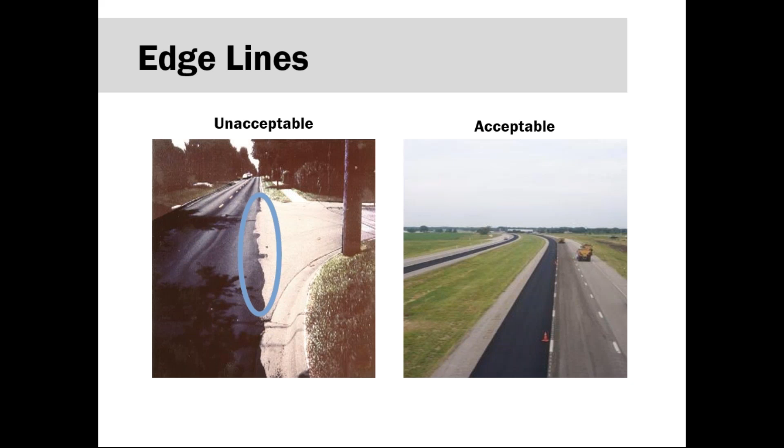You'll see unacceptable pictures here on the left versus the right. That's pretty self-explanatory. The picture on the right will illustrate proper alignment. It's a stable mix with good equipment and the use of an adequate guideline.

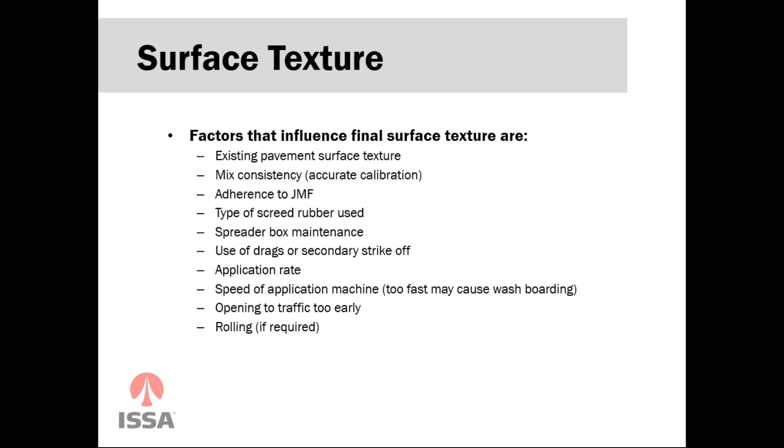So factors that will influence final surface texture: you've got existing pavement surface texture. As we discussed earlier, we're as good as what we're going on. Your mix consistency or accurate calibration, your adherence to job mix formula, the type of screed rubber you're using or length could affect that. Your spreader box maintenance, the use of drags or secondary strike off, your application rate, the speed of application as to how fast or slow you're putting down could cause washboarding, opening to traffic too early, and or rolling if required could all affect your final surface textures.

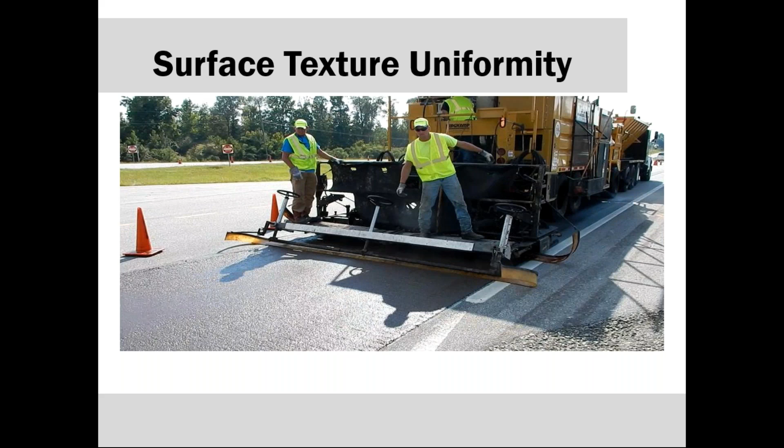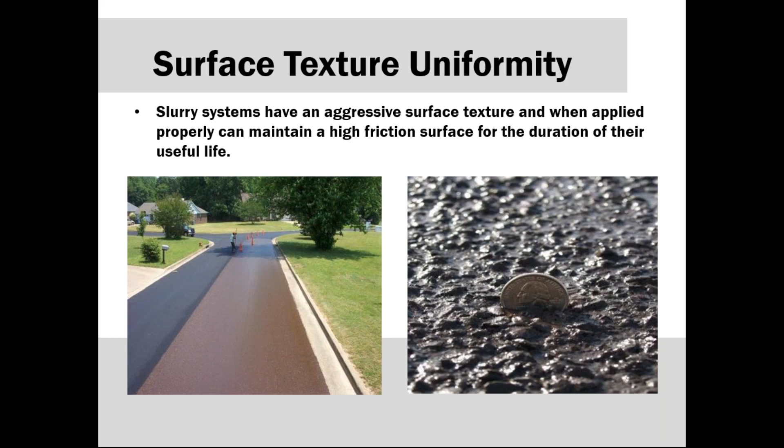So some possible problems or defects we could see from laying micro slurry is bleeding or flushing, surface loss, raveling, or even rutting that we could self-induce.

So bleeding can be caused by excess asphalt in the mix. That could be brought on from a calibration issue, or it could be a paver issue, it could be a pump issue. You could have lack of fines in the mix, so there may not be enough surface area for the emulsion to stick to. Your application rate could be too high for the gradation, or you could have an incorrect emulsion on the project.

When you talk about debonding or delamination, some things usually cause that: poor surface preparation, which we've discussed earlier. You could have contamination from the paving process, larger objects in the mix causing surface loss, the mixture breaking or curing too quickly, or debonding or deterioration.

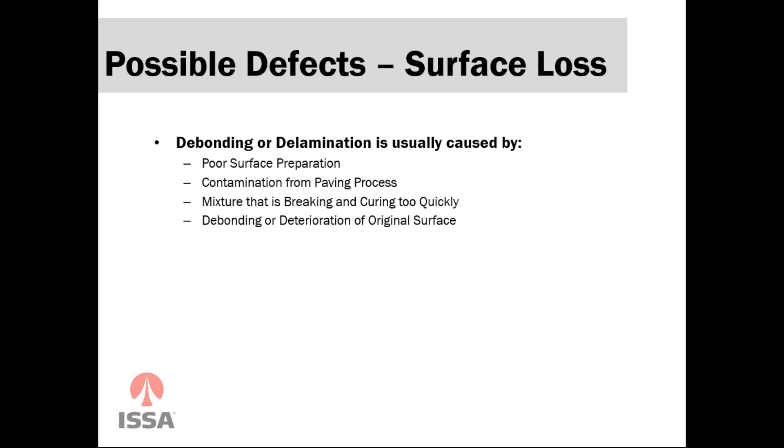This is not good when you're talking about a surface loss. Debonding from the underlying surface can be caused by vegetation, animal carcasses—obviously that leaves a lump, if you live in the South it might look like an armadillo—loose aggregate or soil, equipment leaking oil or fluid, dry aggregate contaminating the surface, and even snow plowing can cause debonding at high spots in existing pavement cross sections.

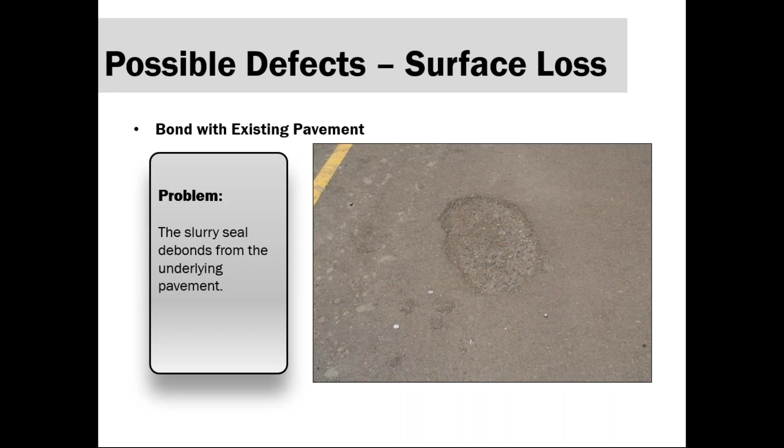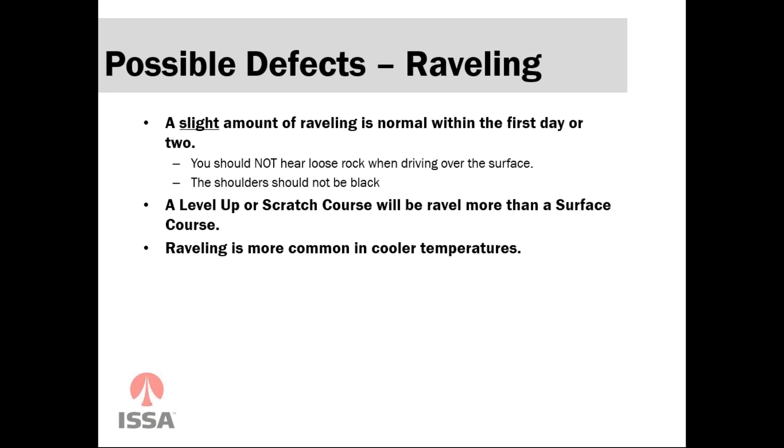This photo is an example of what will occur if the pavement is not prepared correctly. A slight amount of raveling is normal within the first day or two. You should not, when driving down the road after a couple of days, hear rocks hitting the bottom of your car as you move down the road. We'll see raveling more commonly in cooler temperatures as well.

Raveling occurs when larger aggregates dislodge from the surface because the aggregate lacks sufficient embedment in the matrix, or there's not enough quantity to hold the larger aggregate. Poor quality aggregates may debond—it could be an aggregate issue, an application rate that was too thin, or the matrix could lack fines to fill voids between larger aggregates. We could also have premature opening to traffic, or even a summertime storm that pops up before we had time to cure. These are some of the things we discussed earlier: cooler temperatures and premature opening.

Rutting, which is something we're trying to fix in these processes, can also appear at the end of a project—was that the micro surfacing level at completion? Should the road have had more applications before we started? Did the contractor put the rut in the mat themselves? Did they get on the road too early and not put enough material in those ruts to fill them? And is the underlying surface continuing to rut?

Did we meet the job mix formula, or the other requirements of the project? And as we've discussed ad nauseum, is our aggregate and emulsion meeting our mix design to be able to fulfill the obligations we have on the job?

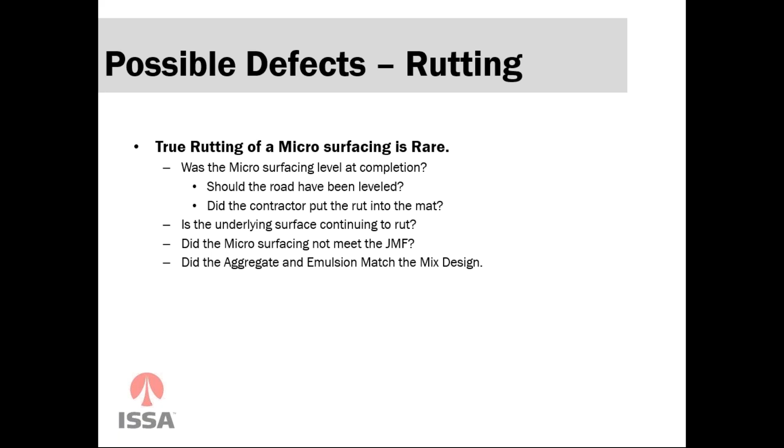So these are a bunch of things we've discussed. We've gone through a lot of information extremely quickly—it's kind of a 30,000 foot flyby of the things that could cause you to do things right or wrong. I know most of our contractors out there are doing this on a daily basis and performing above expectations, but we wanted to bring this out and show you our view of what it takes to be successful. Like we said, it starts with your materials and your calibration—that's the keyword. You can do all these things correctly, but if your calibrations aren't being kept up with or done correctly, none of this is going to matter, and you're going to be fighting things throughout the process.

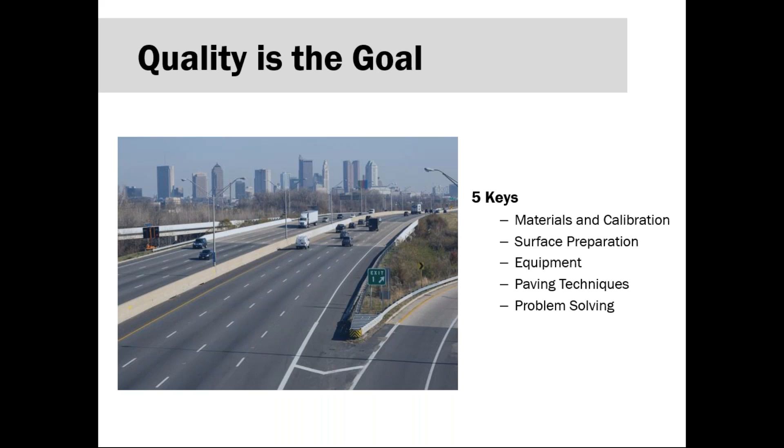The first question: can you verify the speed of a continuous paver? Someone asked if it's accurate to say a continuous paver can only move about 15 to 17 miles per hour. No—you definitely wouldn't want to pave at 15 to 17 miles per hour. It can move up to 30 to 35 miles an hour.

Like I said, it is not street legal. There are no seat belts, so that is not recommended. When you're moving that product from job to job, a lowboy is what would be required—not always the case if locations are close. But it can exceed 30 to 35 miles an hour, and your paver is being tracked. An electronic piece of equipment is being tracked by the radar. In mechanical, obviously that's a different scenario, but yes, it can exceed those parameters.

Okay, and how about in terms of lane miles for a truck mount versus a continuous, how would that comparison look? So obviously there's a lot of parameters to that answer, depending on if you're doing a subdivision, city streets, or rural highway.

To compare apples to apples, if you went on a rural highway where you could close 4 or 5 lane miles at a time, you're probably going to do 1.5 to 2 miles with the continuous paver versus a mile with the truck mount, simply because as long as material's moving and the equipment is performing, that continuous paver is never stopping.